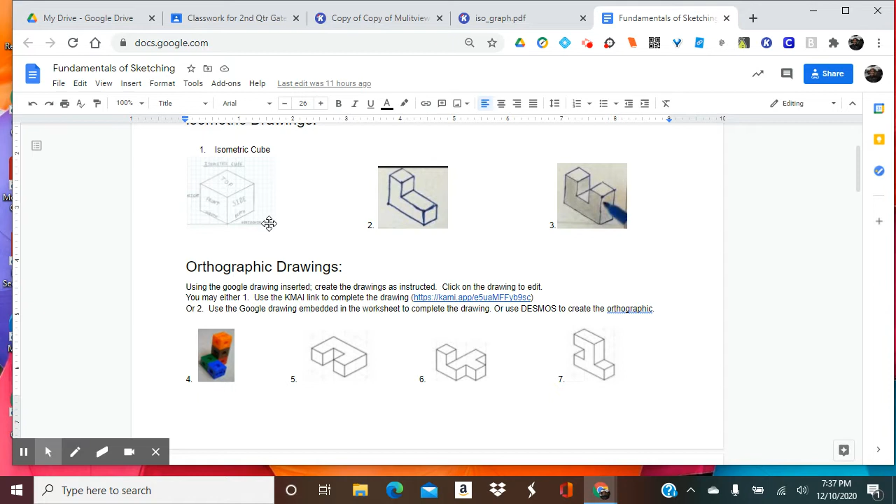So today's video is fundamentals of sketching. I'm going to walk through isometric sketches. We're going to do 7 isometric sketches for the first part of the assignment. The second part is to create each isometric sketch again and then split it into a multi-view orthographic sketch.

The first thing we're going to do is go to our Google Classroom, choose the isograph PDF, and open that in Kami, which will create this document. I'm going to split my screen so I can see what I'm drawing.

First thing we're going to draw is an isometric cube. I've zoomed in so I can see it. I'm going to grab the line tool and start on a point, pick a point, and follow the line. I'm going to go 2 by 2, up 2 lines, and then up 2 lines again. From here, I'll go straight up 2, and again 2. Now I have those 3 lines, and I'm going to connect them. Then across from here, I'll start and connect the lines again. So what I've just created is an isometric cube.

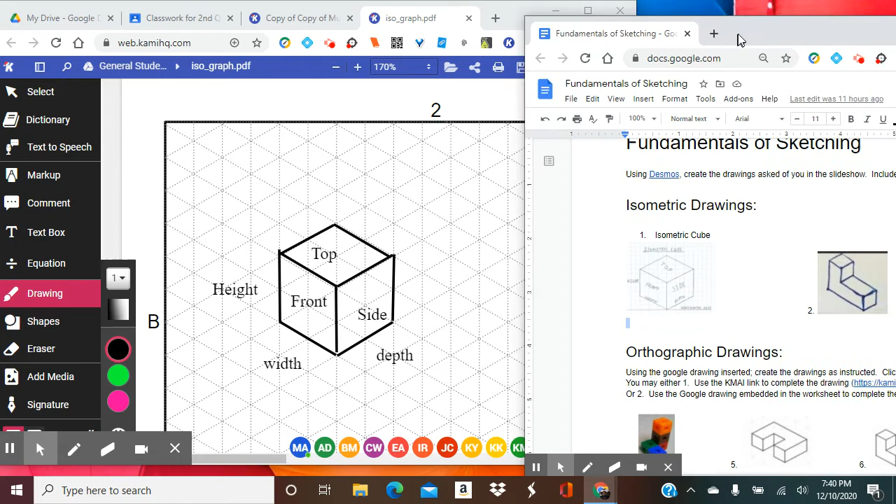So then we're going to go and create the next shape. Let me scroll over a little bit to give me some room.

So our next shape kind of looks like this. I like to draw what's easy for me to see, and sometimes it's easier, instead of starting at the V and going up, to start at the front view. So a lot of times I'll go with the front view or the top view and draw from there. This next shape I'm going to draw from the front view - let me show you what I mean.

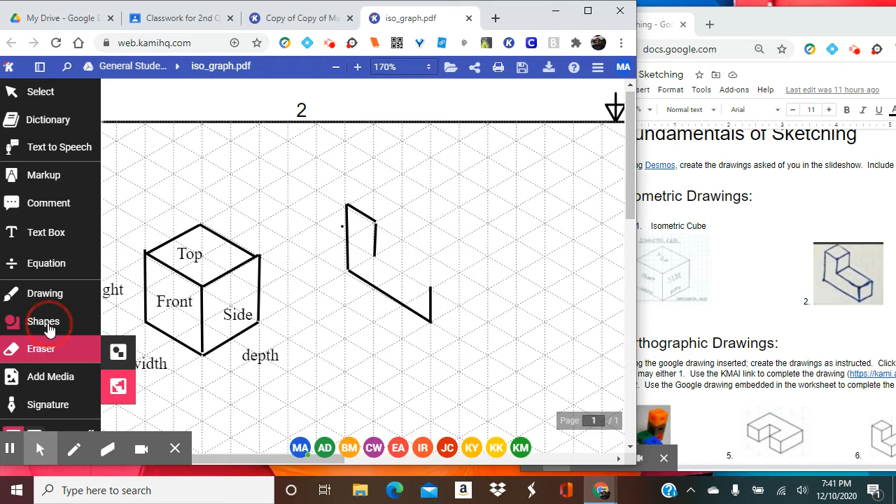I still have my V, it's still a 30-degree angle. I'm going to go over 1 and up 3, and then up 2. So basically what I'm drawing is what I see - if I were looking at this shape as blocks, I would draw this. Let me try that again. There we go - so this is the front of my block.

Now I'm going to add the depth lines. I'll go back and add my depth lines here, which creates my V's. So then I'm creating my depth lines, and now all I have to do is attach those lines. Now I have my shape - the front is here, this is the top, and the side is here. This is the side view.

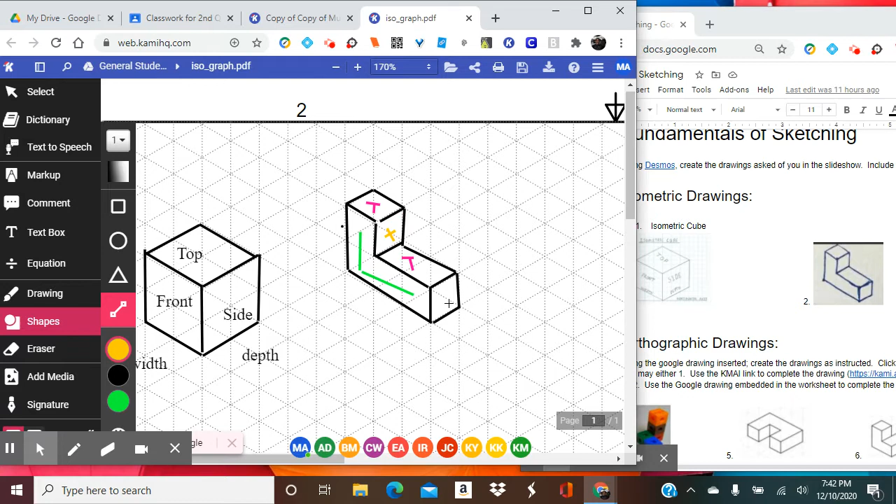That's going to come in handy when we talk at the end of the video when we go into the orthographic section.

The third shape we're going to draw looks like a horseshoe. I'm going to slide over a little bit more. We're going to draw the same shape in two different ways. The first way, again, I'm going to draw from the front view - over 2, 3 over. There we go. And then I'm going to add my depth.

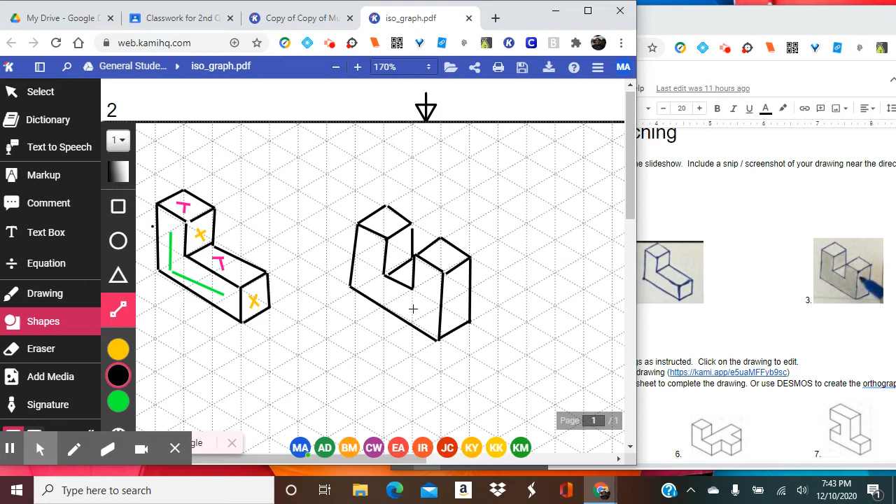And then again, we have our front, our top, and our side.

The fourth shape we're going to draw looks like it has two pieces, so I'm going to draw this one a little bit differently - from the top down. I have the top of the shape, and then I'm going to add legs to go down, adding my height. That's another way to draw an isometric shape - it really does just depend on what you see when you're looking at it. Now I'm going to go from here and add the back of that shape.

And then I'm going to go straight down. Okay, so that is the fourth shape, shape number 4.

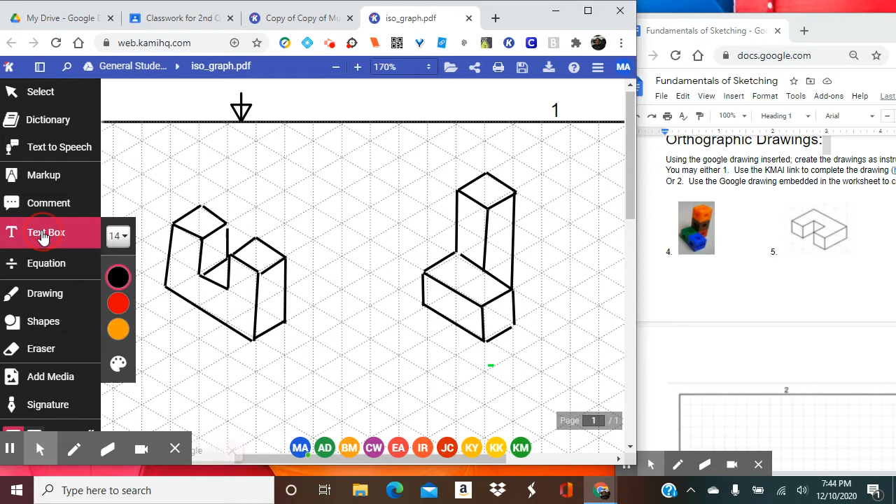And our fifth shape is this one again, only it's facing a different direction. I'm going to move the box so you can see, and we're going to face it a different way. For shape number 5, I'm still going to draw it from the view that looks like a horseshoe, just because it's easier to see that way, so you can see how the same shape looks in two different perspectives. This is the same shape as this, the only difference is the angle.

So when I looked at this shape, I see 3 separate sections in the front. If I look at this one from the front, I'm only going to see 1. There's the same shape, just in a different perspective.

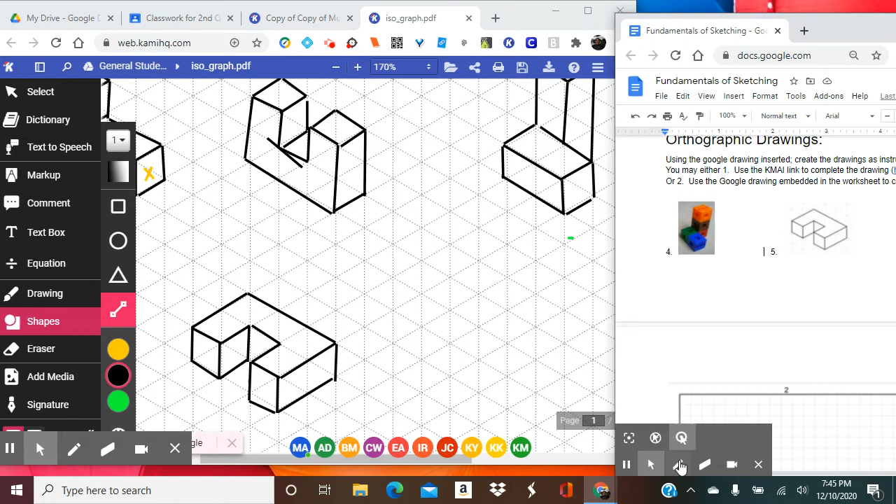Now shape number 6. Shape number 6 is a little complicated. When I look at the shape, I see the T first, so I'm going to draw that, what I see. I'm going to come here and draw what looks like a T, and then finish that shape off.

Now, some teachers might say no, you need to use just the V's when you're drawing, but I personally, as long as you're getting the job done and it's still an isometric sketch, how you do it is fine with me. I personally believe there's more than one way to get the job done. As long as the job gets done, it doesn't matter how you get there. That's just me. So there you go, there's the 6th shape.

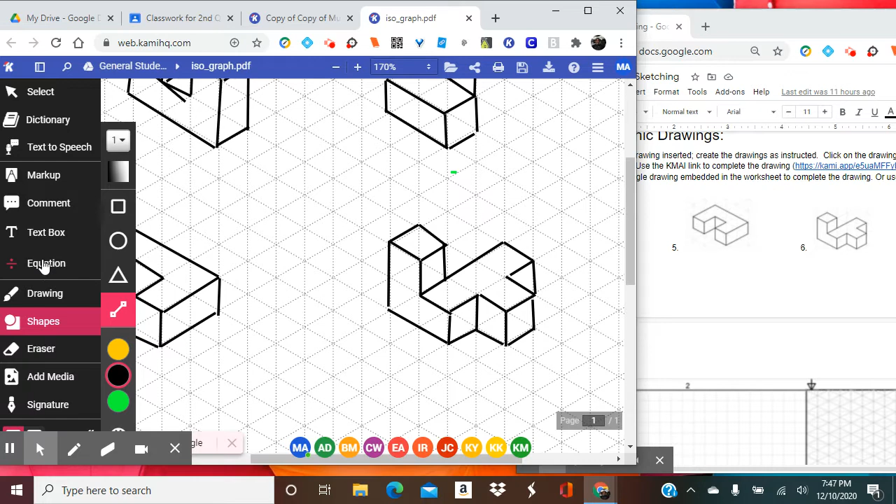And we have one more. The seventh shape looks like a number 1 to me, so that is what I'm going to do. Let me find some more room on my paper. I'm going to draw the front view again, that's what I see when I look at it. This is a 30-degree angle, you can see the angle there.

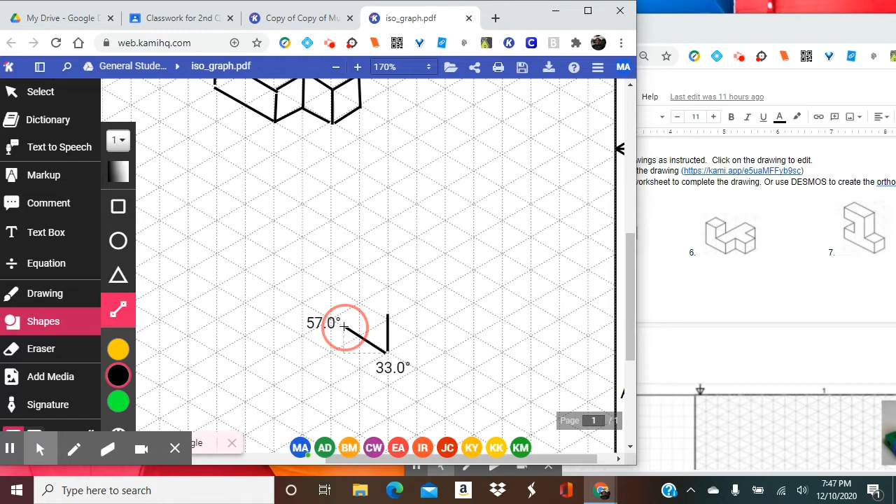That is indicative of an isometric shape. So when you start drawing these isometric shapes without isometric paper, you have to make sure you have that angle right, otherwise it's going to look really weird. So there's my shape, my front of my shape, it looks like a number 1 to me. And then I'm going to add my depth lines to it.

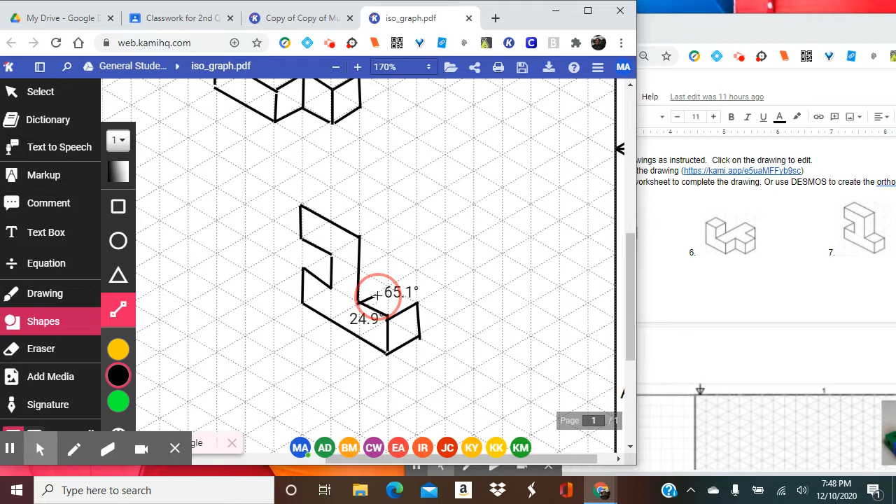So every time I have a point, that's where I'm going to have a line. And there we go, there is my 7th shape.

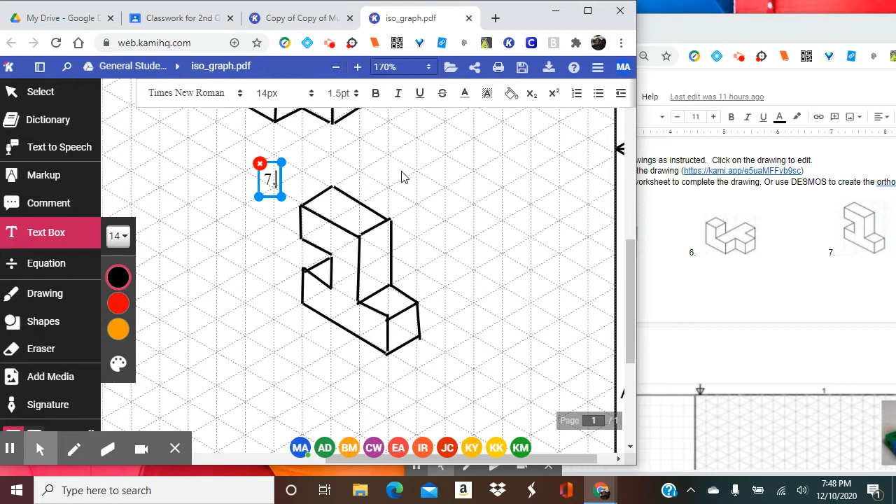Okay, so when you're done with this one, you can do two different things. You can take a picture of it, take a screenshot and add it to the document, or you can save it, share it, and then upload this shared file. So that's that one.

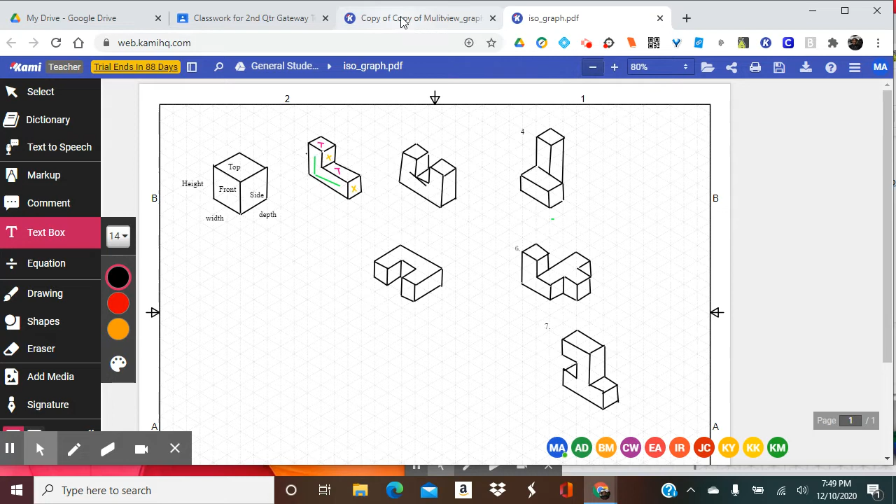So now we're going to go to the multi-view. There's 2 different options for the multi-view. You can open up the copy of multi-view in Google Classroom and open it in Kami, and this is what you will see, so you'll be able to use your isometric and then your front, top, and side. I also added graph paper, so you can do the same thing on those.

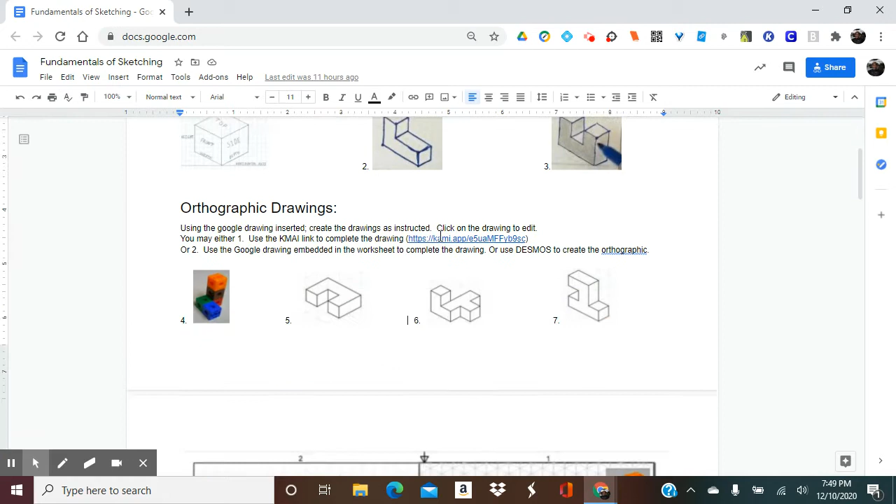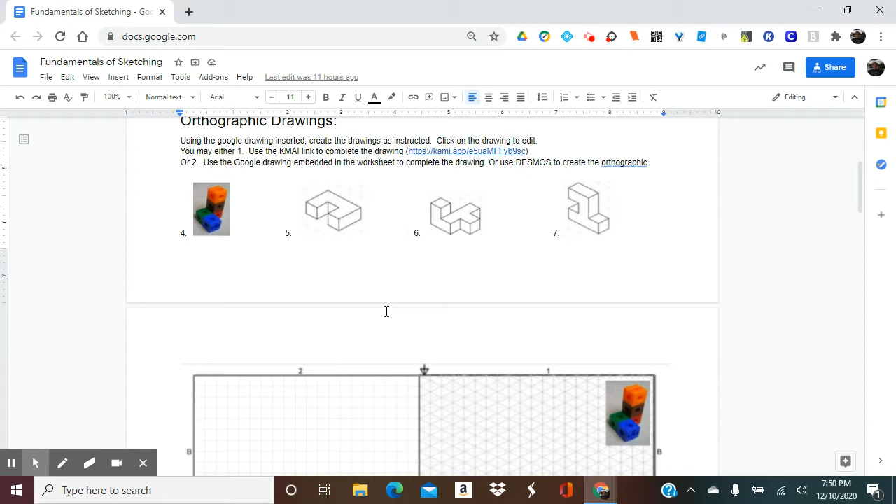The other option is right on this document, you're going to draw right on the document. I added the isograph paper here for us to practice with. It's not quite as pretty as it would be on Kami, but it gets the job done, simply because I can't zoom in very well. So what we're going to do is draw an isometric sketch here. I'm going to attempt to zoom in a little bit. It doesn't do anything for me.

Okay, let's try that again. There we go, alright, let's try this again. I'm going to zoom in and go to the isometric section. This is my shape, we just did this. If you're doing it all at the same time, I'm going to use the arrow key, the line, and do my very best to create this isometrically, just like we did. It's a little bit different in Google Drawing, simply because I can't zoom in as well as I could with Kami.

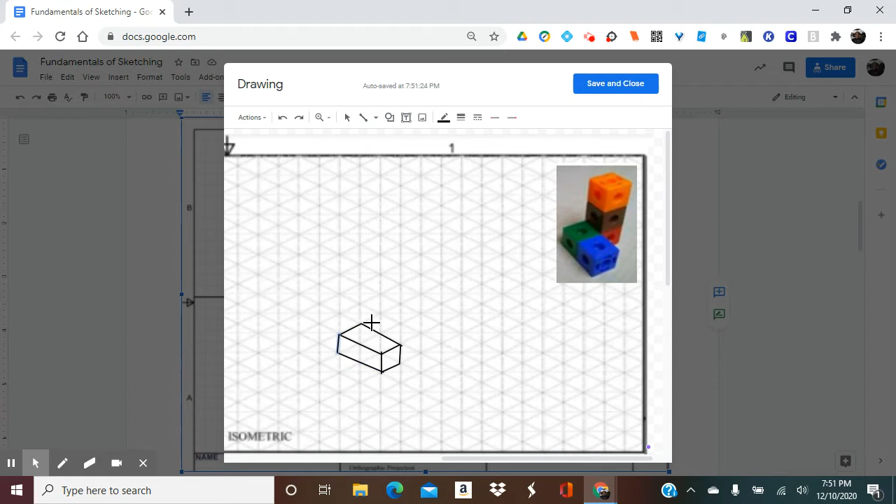But it does get the job done, and you don't have to go back and forth and try to make a picture. So I'm drawing that. Doesn't have to be cute. I'm okay with it being a little rough, because mine is. So there is my isometric.

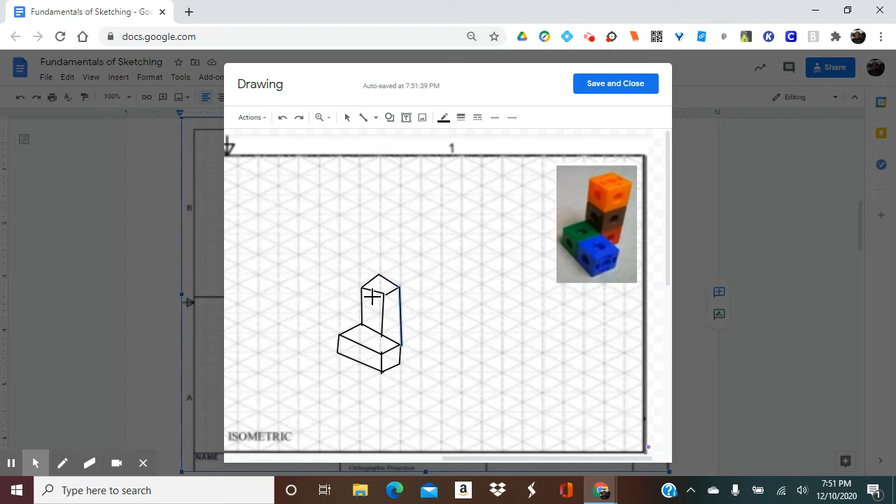So then what I'm going to do is take my front view, this is my front view, and put it into the front section. So I'm going to go over to my front view. So this is the top, front is here.

Okay, so now it doesn't really matter if you do 1 block for 1 block, or you could do 2 for 2. So you can make these a little bit bigger. Doesn't have to be anything particular, just to kind of make it even. So it's 2 blocks basically over and 2 blocks up, or 3 blocks up.

So I'm going to go ahead and do 2 blocks for every block, make it a little bit bigger, maybe a little easier. For this particular one, I could use a rectangle tool. So if I wanted to, there's 1, there's 2, so I'm going to make it 2, and then I'm going to do another one, and go straight up. So I have 1, 2, 3, 4 blocks instead of 2. There you go.

So then there is my front view of that shape. I do want to make guidelines. A guideline is going to kind of help you determine where to put the next shape. So I'm going to make some guidelines here.

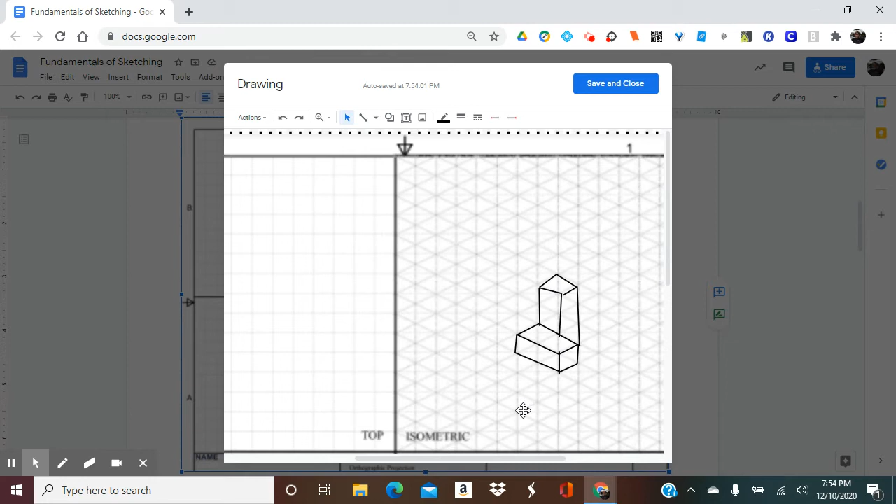All right, so now what I'm going to do is draw the top view, and the top view is going to show me I have 2 blocks here and 1 block here. So again, I can use rectangles on that one. I'm going to go ahead and do that, using a rectangle.

So first I'm going to have this a rectangle here, a 2 by 2 that equals 1. And then 2 go out. Okay, so that is the bottom of that shape, and now we need this top section here.

So then we're going to just add a rectangle to the top. Now, typically you have the hidden lines. We talked about the hidden lines previously, and it is okay to have the lines the way they are, simply because this shows that there is a level difference, an elevation difference between this block and this block. That's why the lines are okay there. Same here, it shows that there's an elevation difference between this block and this block. If it were all one, then we would know that it's the same level.

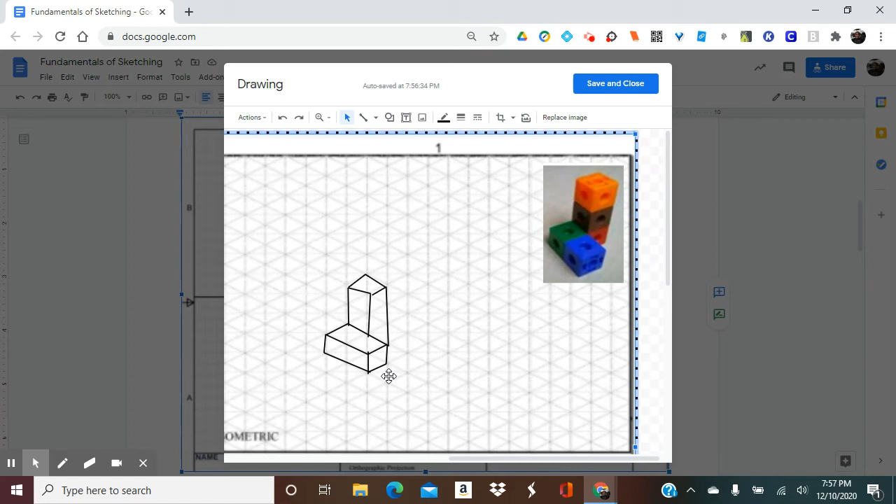So now when we go to our side view, it has 3 all one level and then 1 here. So again, we can use the rectangle tool on this one. The rectangle tool doesn't always work for this assignment, but for this particular shape it does.

So I need 1 block here, and then I'm going to make another block that is going to start here, and it's going to go up 3, basically all the way up to the line that we created, the guideline. That's why we made it that way, so you knew where to stop without having to go all the way across. Okay, so then that is my side view.

And go ahead and zoom out so you can see. Okay, so there is our orthographic sketch. So you have your isometric view, and then we've split the isometric view into front, top, and side.

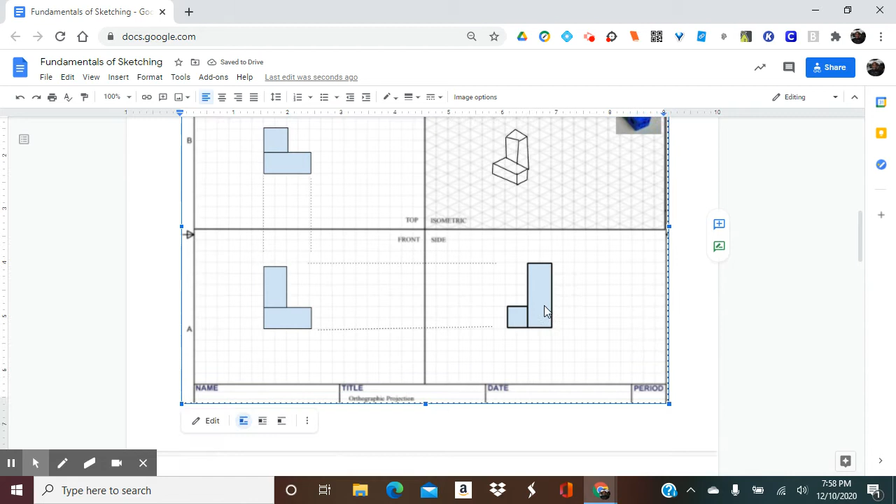Okay, so then you save and close, and then that'll show me that you did it, and then we're going to go ahead and move down to the next one. Okay, so then again, double click, open that up.

And we're going to go ahead and do the same thing. All right, so I'm going to first make this shape. So this is my front. Front has 3 levels. So we're going to make it in isometric first. Let's do that. So I'm going to draw the top just because it has the least amount of lines.

For some of you, this is all review. We've done these shapes before. If you took my classes last year, you will have done these already, so it should be coming back to you. If you are new to this, don't get stressed out about it. It's okay, you'll get better at it as you go. This is something that if you take Project Lead the Way classes in high school, you'll be expected to do.

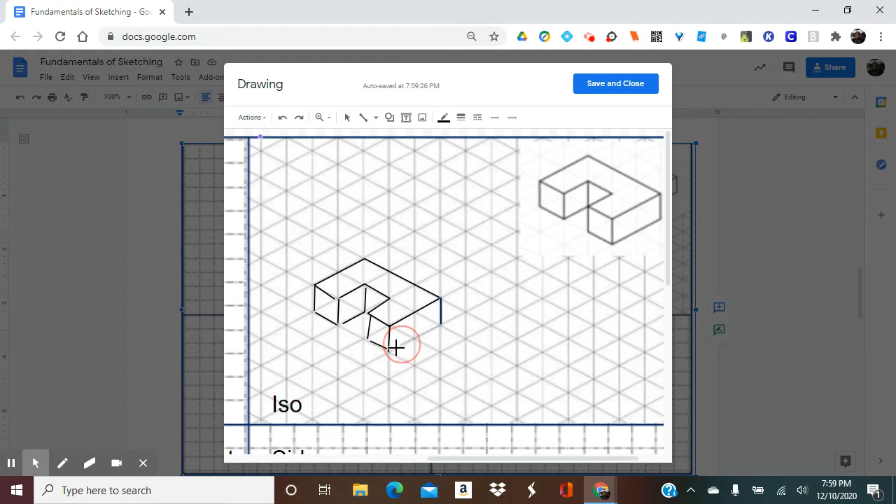Okay, so there's my front view. This is front, this is top, this is side. This shows you here that you have two different levels, so we're going to have lines here. And this one looks like one different level, but there's a hidden section, so we're going to have a hidden line on this one.

Okay, so we're going to go ahead and go down to the front view. I'm going to make it bigger than 1 by 1 just to make it easier to see. I'm going to go ahead and draw this one, so I'm going to go here, 2, 3 blocks. And I have 3 different levels, so I'm going to go ahead and draw a line down, and that's just going to show you basically that on my front view I have an elevation difference so that I have 3 lines. So then I'm going to go ahead and draw my guidelines.

Okay, and same thing here. Guidelines are just to help you stay in the right zone. Again, your front, top, and side have to be in the correct order. Like if I drew the top view way over here, it would not be an orthographic sketch. It would be something completely different, which is not what we're going for here, okay?

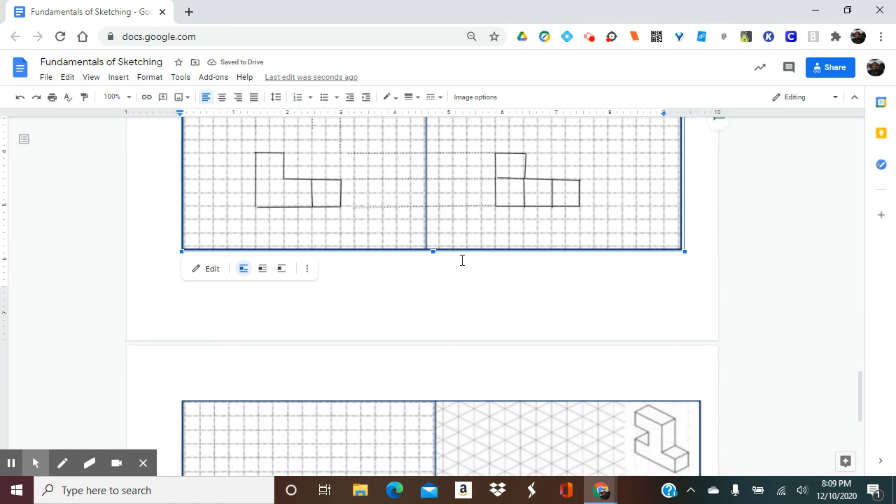And one more here. Okay, same thing.

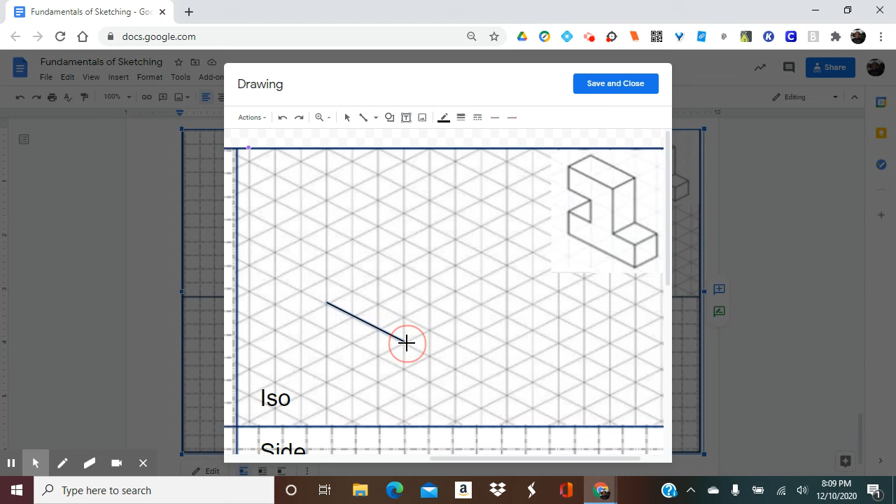All right, I'm going to first do my isometric. If it's easier to make the isometric bigger and you have room for it, go ahead. Doesn't really matter if it's size for size. It's just practicing the drawing and seeing it.

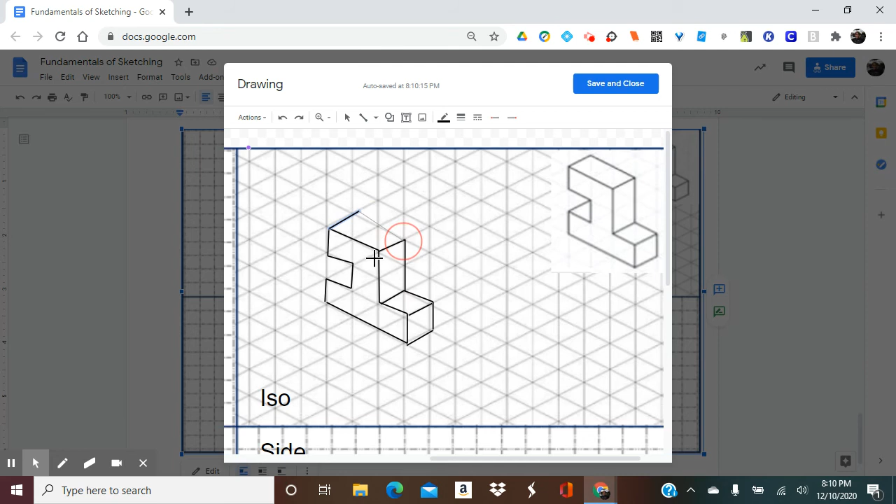Believe it or not, not everyone can see these shapes as easily as others. So if you're struggling with seeing the shape come alive, then that's okay. That happens. Don't worry about it. Okay, so there's my isometric.

So this is going to be my front view. It's going to look like a number 1. So I'm going to go ahead and do the front view. Your front view should usually almost always be the view that has the least hidden lines, so it should be the one that you don't have to draw any extras with. Some of the shapes we drew already that were like that should have probably been switched around.

All right, there you go. So there's their front view. And I'm going to go ahead and put my guidelines in. I'm going to go ahead and put one here as well, just so I know.

So the guidelines, as you can tell, are just there to guide you to make the shape a little easier to draw. Okay, so now my top view looks like 1. It's going to be 2, and then here, then I'm going to have a hidden line because I have a hidden section right here.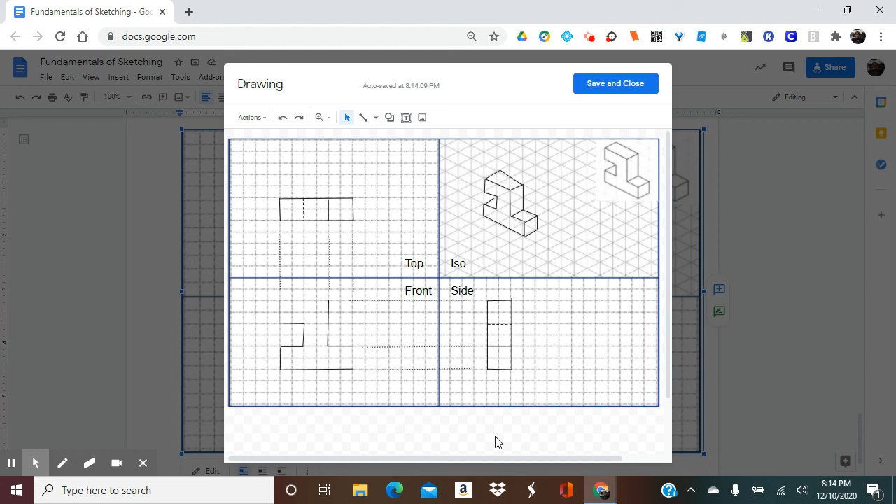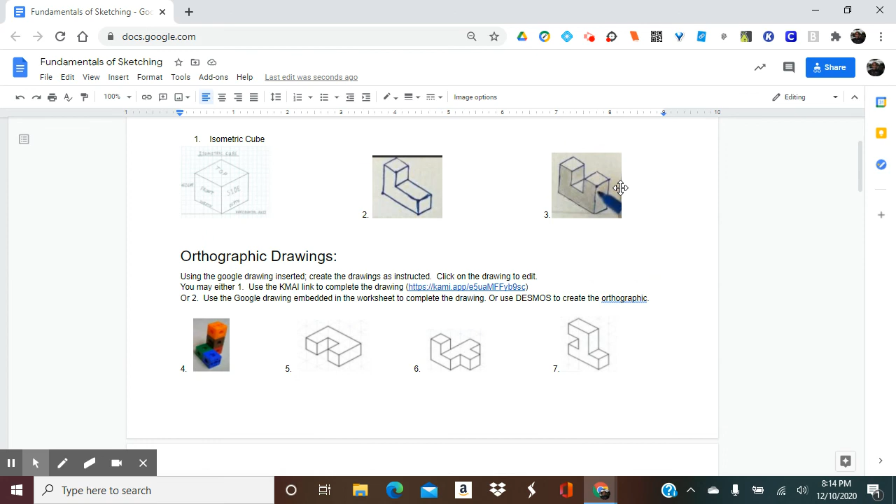All right, once you have all of these in, again, all you have to do is insert a picture of the first 7 drawings, my apologies, and then have these in there, and you are done. All right, congratulations on that.